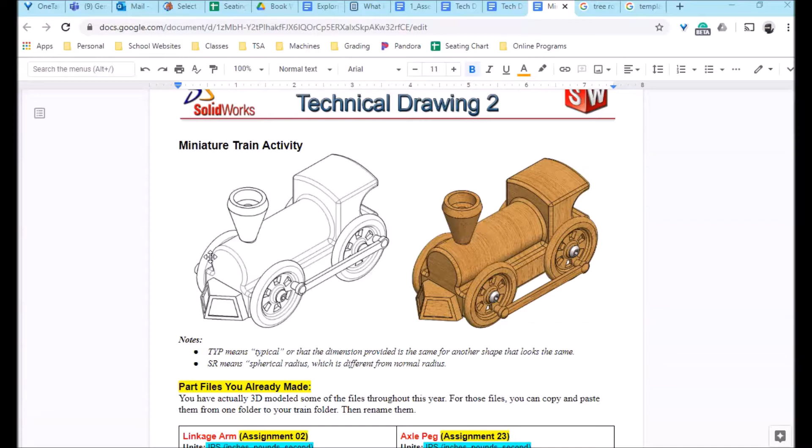Hello, this is Mr. Jarrett, and in this video tutorial we are going to be 3D modeling the remainder of these miniature train parts and going through the assembly in SOLIDWORKS.

Depending on your class year, this may change from year to year, but in most cases you've probably already drawn a lot of these parts for the train. The assignment number might have changed since I change the class all the time, so just look at the pictures and think back to what you've already drawn and check it off.

For the year that I'm actually making this, students would have already made the linkage arm, the axle peg, the smokestack, the wheel, the train body, and the cow catcher. That's in most years, so depending on when you're taking the class, you may have more done than that.

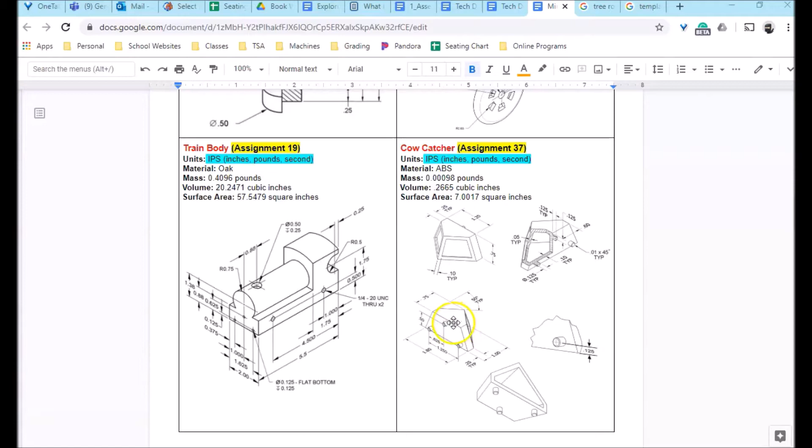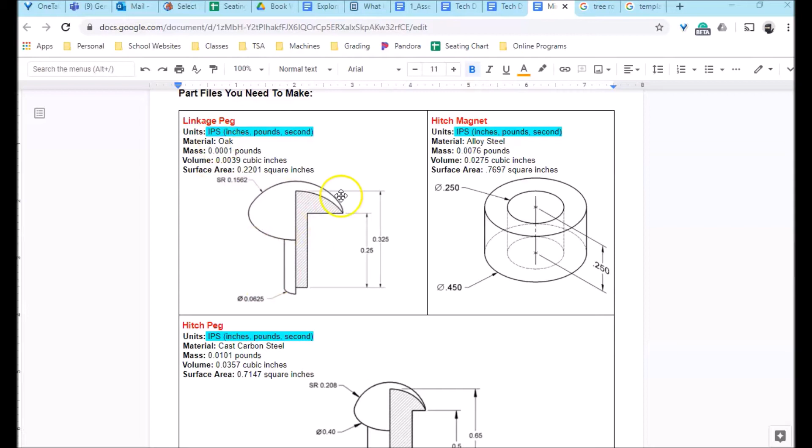The extra files, which I don't necessarily draw in class because they're so easy, are the remaining ones: the linkage peg, the hitch magnet, and the hitch peg. We're going to start by drawing these. As you can see, they're all in inches. The majority of them are oak - this one's oak - and I guess this is alloy steel and cast carbon steel.

I'm going to pull this to my other screen, and I'm just going to start out by making new parts. We're going to go right through each one. We're going to draw the linkage peg first.

Make sure you're in IPS, and I'm going to be sketching right on the front plane. It doesn't necessarily matter where you put the origin, so I'm just going to put the origin down at the bottom. I'm going to go straight up, and then it says spherical radius. If you have the line tool, you can move your mouse over this dot so it curves. If yours does not do that, you can just get the curve tool. I'm just going to come straight in and down like this.

A spherical radius means when this is an actual three-dimensional shape, you don't have a dimple here, meaning the center point needs to be on this center line.

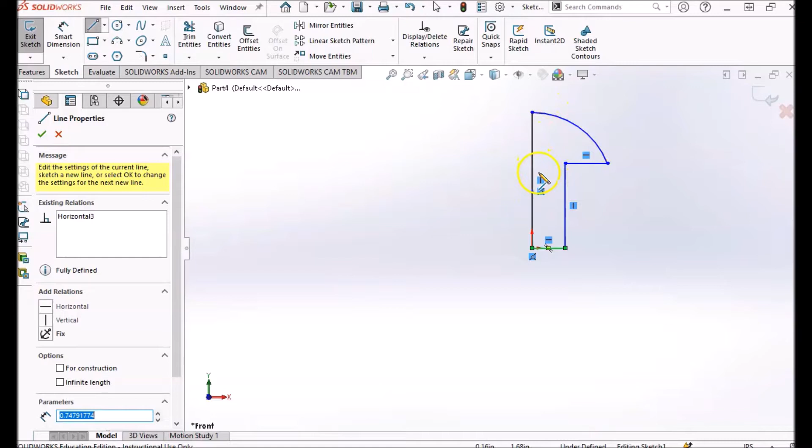Okay, so then we can go ahead and actually dimension this. It says this has a diameter down here of 0.0625, but we're only drawing half of this currently, so you have to divide that by 2. You can set this to 4 or 5 decimal places if you'd like - this is actually 5 decimal places, but it doesn't matter to me if you do that.

Then this is 0.25, and we do not have to divide that by 2 because we're talking height here. This is 0.325. And it says that this has a radius of 0.1562 - kind of an odd measurement.

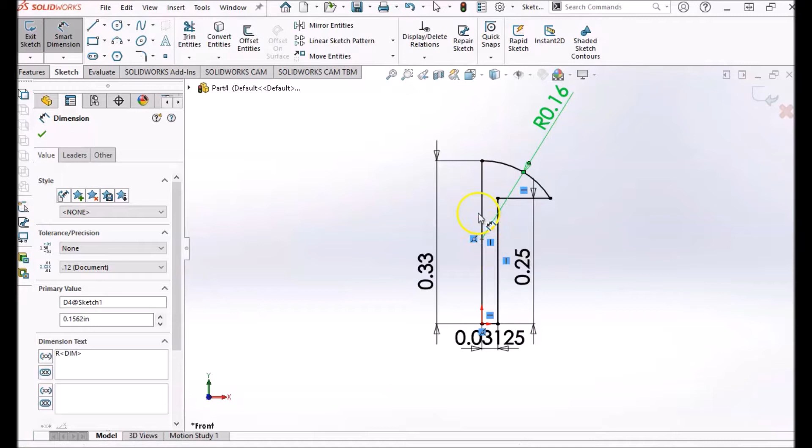Make sure that the center point is coincident with this center line, so it's right on that center line. You can go to the Features tab and hit Revolve Boss Base, and we want this center line as the axis of revolution. Okay, we can change our material to oak.

You probably have to go into Edit Material and down to Wood. I have mine set as a preset, but I probably did not do that with you in the past. So go to Edit Material, down to Woods and Oak, then Apply and close.

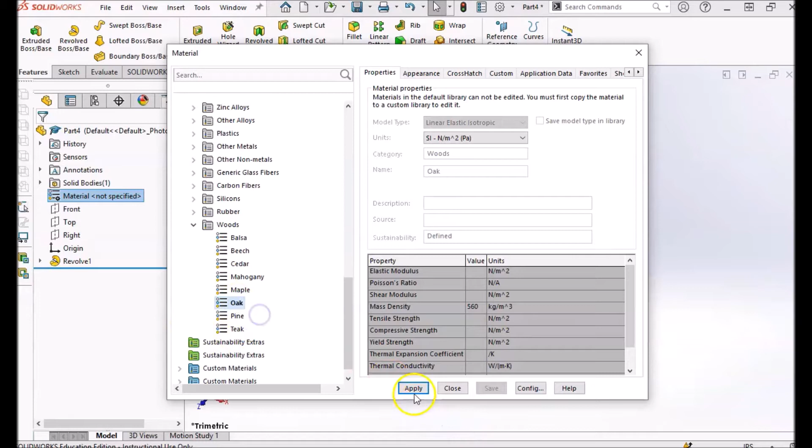You can evaluate it and check it, but I know this is correct, so I'm just going to save this. You can go File, Save As, and save it as the linkage peg.

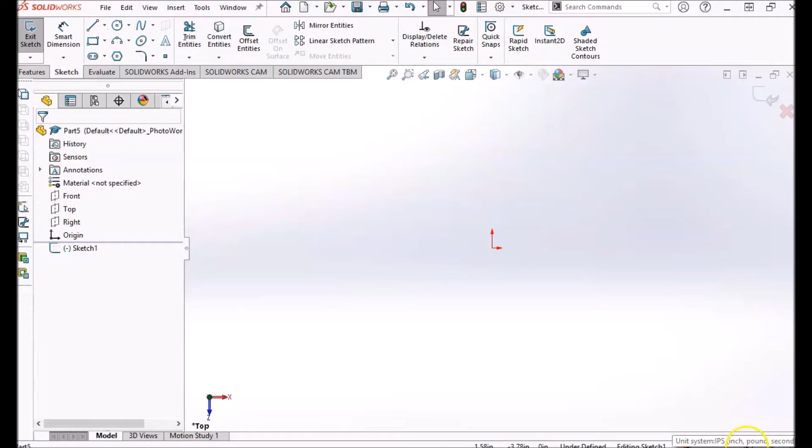Then you can start a new part file - and you notice I didn't save mine because I already have these done. But you're going to make a new part file, and this time we are going to be sketching right on the top plane. Again, we are in IPS. It doesn't matter if you go on the top plane or front plane, but we're going to be drawing with the circle tool, 2 circles, both centers right on the origin.

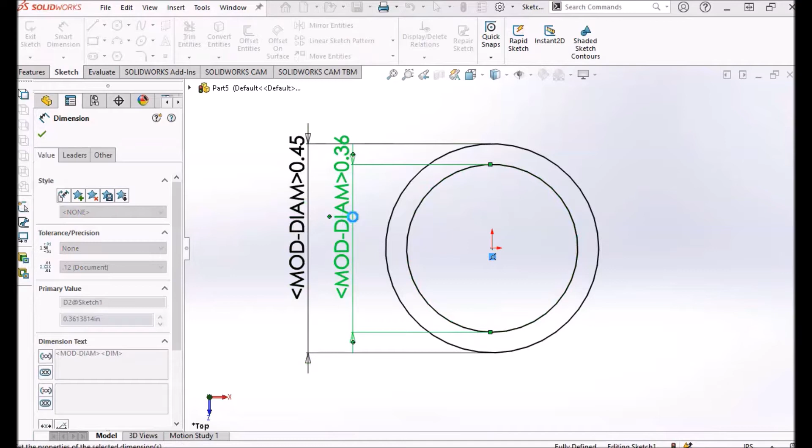Then you can go ahead and start to dimension this. The outside is a diameter of 0.45, the inside is a diameter of 0.36. And we're going to extrude this a total of 0.25.

We can change our material - that's alloy steel, so notice that's not one of these presets. We can hit Edit Material, and in the steel folder, we just need to scroll down until we find alloy steel. Hit Apply and close, and now you can save this as well. This is the hitch magnet.

Then we can make another part. And this time we are going to do the hitch peg. This one's very similar to the linkage peg, just a little bit different in shape and size.

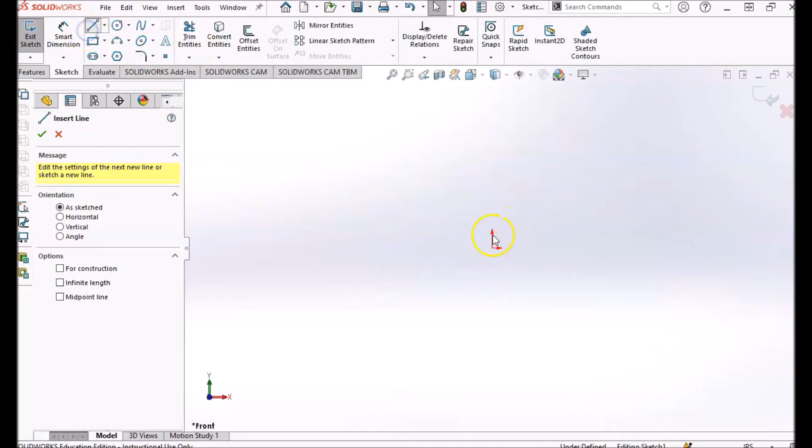So again, I'm just going to draw this on the front plane, origin right here in the middle. This is still in inches. You can wiggle your mouse back over that dot with the line tool, and it should give you a curve. If it doesn't, move your mouse over that again. You see it kind of changes through the different curve tools. Straight over, down, and back.

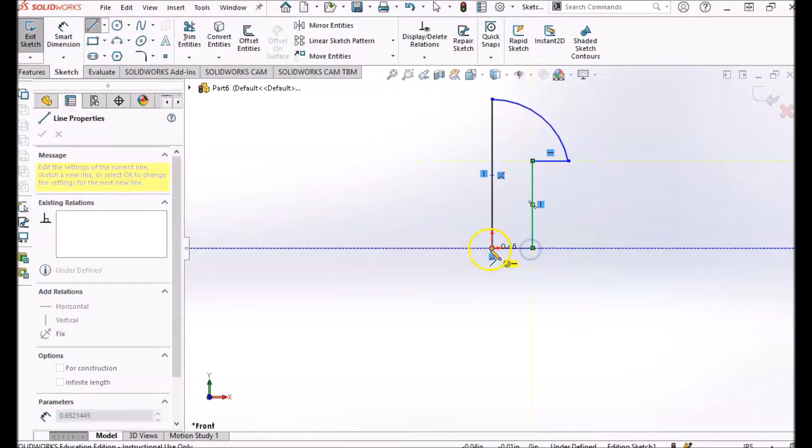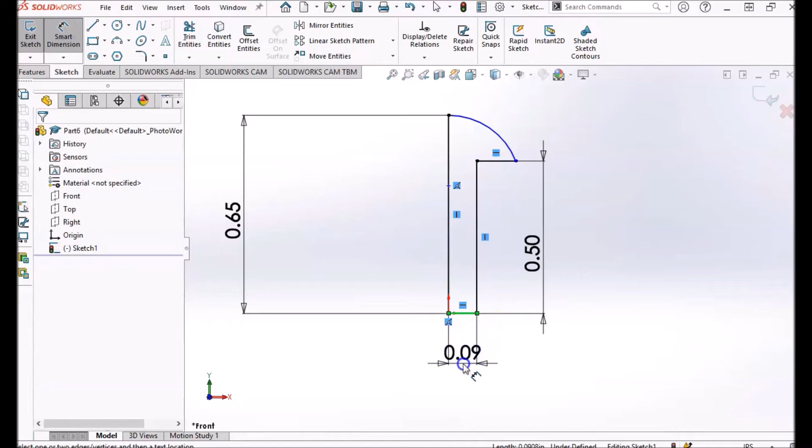Okay, then you can go ahead and start to dimension a lot of this. So 0.5 is the underneath height, and the overall height is 0.65. Mine kind of got messed up here, so if you hit escape and move your dots around to keep that general shape, that's what you're looking for. This line at the bottom has a diameter of 0.25, but since we're only drawing half, we divide that by 2, so that's 0.125.

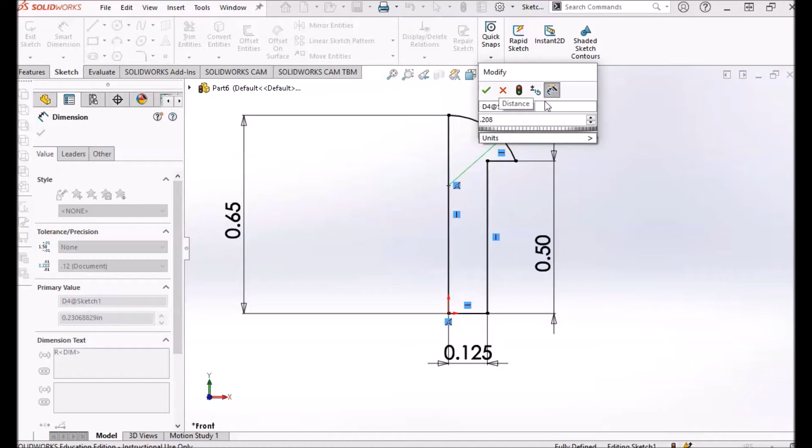Then once again we have a spherical radius up here, and that is 0.208. Since that's a radius, we don't have to divide that by 2. Make sure that your center point for that curve is right here, coincident to this center line.

Then we'll go to the Features tab and Revolve Boss Base, and once again we're going to be selecting that center line there. Hit the green check, and now we can change our materials.

So this is cast carbon steel. We're going to hit Edit Material, because that is not one of the defaults. Scroll down, you see cast carbon steel right there in the steel folder. Apply and close. And now you can save this as the hitch peg.

So now we have those 3 drawn. From here, we are going to start assembling our train. So we can start by making a new assembly, and we're going to be doing this all in IPS. When you open up a new assembly, it's going to ask you what you want to insert.

Sometimes this box does not pop up. If that's the case, you have to hit Browse down here in the bottom left. And you can see I have a whole bunch of files in here. You'll be seeing that this is going to take us a long time. There's one with constraints, one without constraints. There's a lot of different stuff that we have to do here.

So we're going to do this bit by bit, easy things first, and then we'll get into the more challenging stuff. So when I say easy stuff first, I mean we are going to be putting in the train body. I believe the train body is going to be assignment 19 in most years. If yours is not really showing pictures, or if your assignment numbers are different, you can change your view options over here to icons, and most times it'll give you the pictures. So assignment 19 for me, the year I made this video, is the train body.

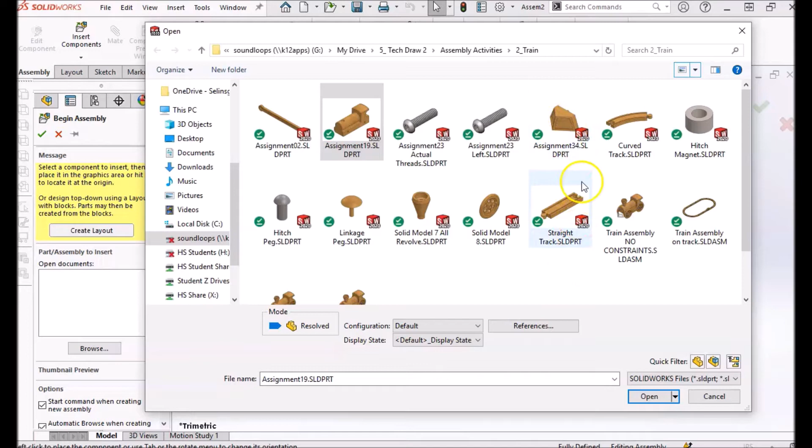So I'm going to be bringing that in. I'm going to hold Control, and I'll do the cow catcher because that's pretty easy. I'll do the hitch magnet, I'll do the hitch peg, and the smokestack for right now. Okay, and I'll hit Open.

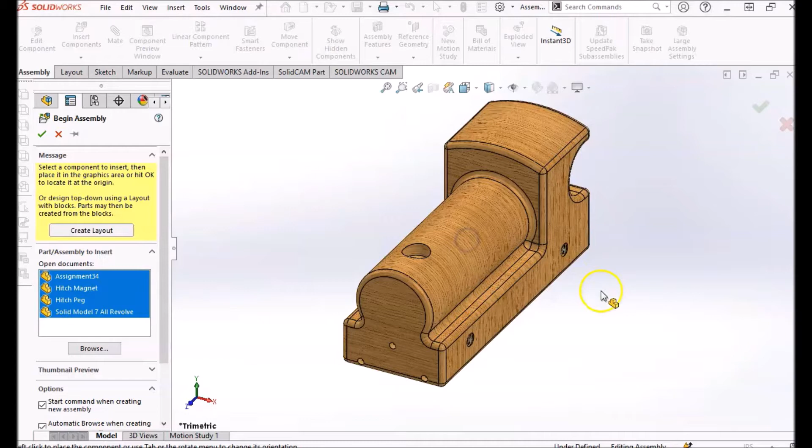So it's going to ask you to place them in, so you can just click to place. I'm going to just put them in the areas that they need to be, so behind the train and in front of the train, and the smokestack goes up on top. Okay, so let's start with this first.

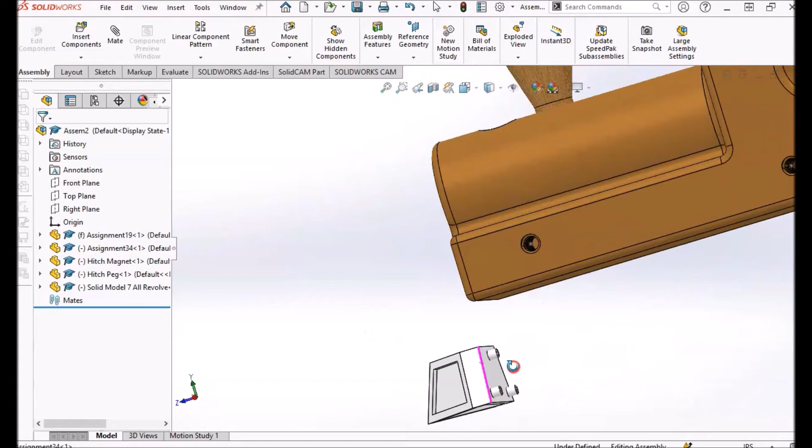You can see there's 3 holes there, and back here there's 3 holes, or 3 pegs. So obviously those go right in those. But before we even do that, we want to make sure that the train body is actually fixed in place. So you can see if I try to move it, since this went in first, and it goes by alphabet, alphabetical, this one was assignment 19.

If your train body is able to move, and say your smokestack is stuck in place for some reason because you had these labeled differently, what you need to do is right click on this, and you would have to hit float, or fix, sorry, it would say fix right here.

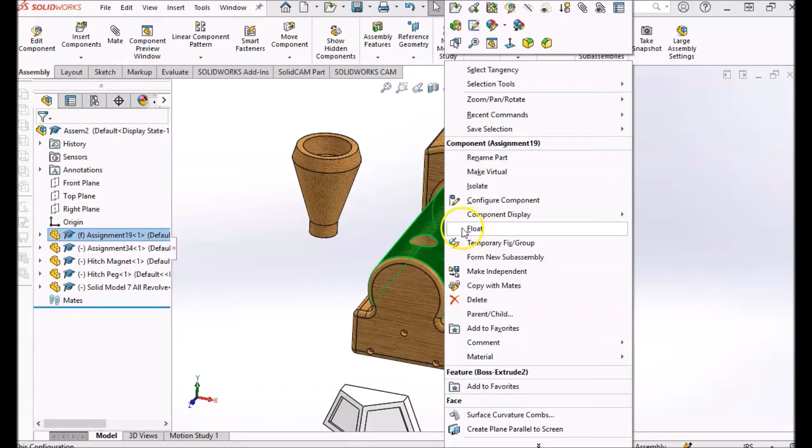And your smokestack you would want to float. But for me, I have it fixed because this is locked in place. So we want the train body to not move, and we want everything else to be underdefined and able to move.

To start out, we're going to get our mate tool, and you could do this a bunch of different ways. I think a very easy way is just putting this top peg in first. If we click right in here on the inside of that cylindrical hole, rotate around and click on the cylindrical peg itself, notice it makes them concentric, so we can hit the green check.

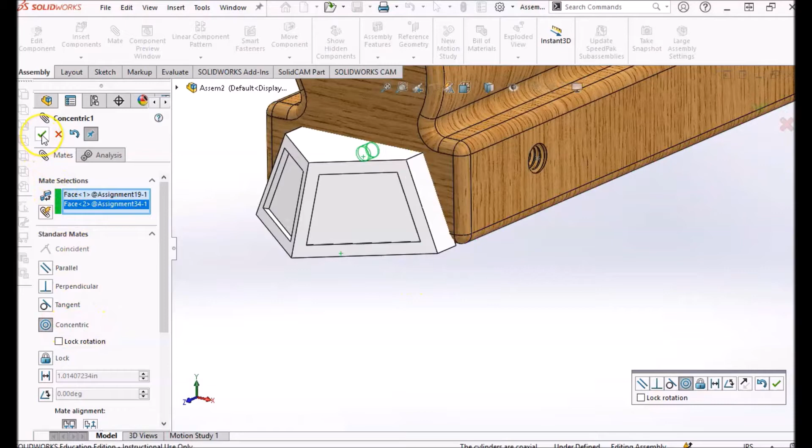Now this thing is kind of stuck in there. It can still rotate and wiggle. So if we do the same thing for this peg, clicking on that peg and this peg right here, now it can't rotate anymore. The only thing it can do is slide in or out.

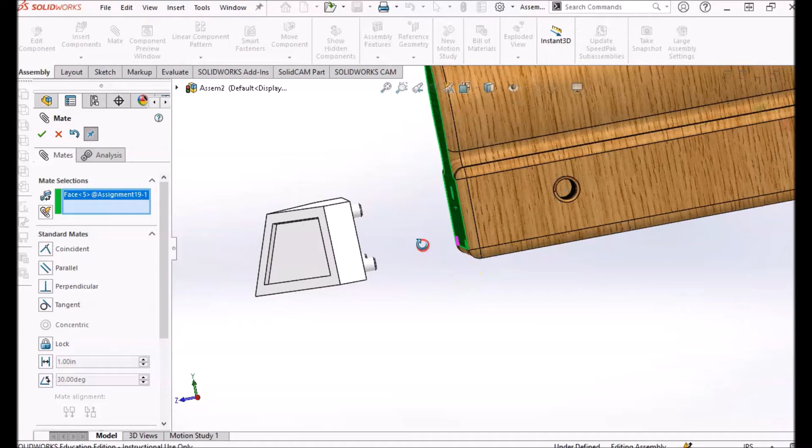So that's pretty simple. Click on the front of the train, back here of the cow catcher, green check, and now it is stuck in place. Okay, so that's number one.

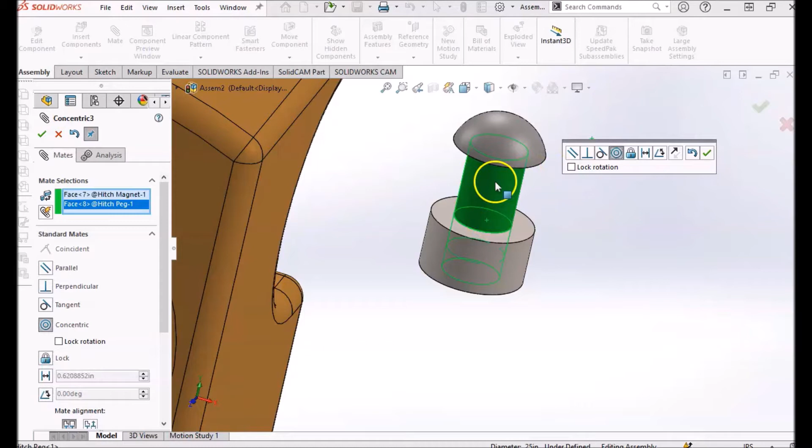Let's go back here to this. So the inside of the hitch magnet and the cylindrical part of the hitch peg, and we're actually going to check the box here for lock rotation so it doesn't rotate on us. Green check, and we'll click on this piece and underneath, so those two go ahead and touch.

If you're wondering what this actually is, in the old toy trains this was kind of just like a bolt that was glued in. I don't think it had threads, it just got glued in. And this is actually a magnet. So since this is a piece of metal that is magnetic, this round piece would be on the front of the next body of the train.

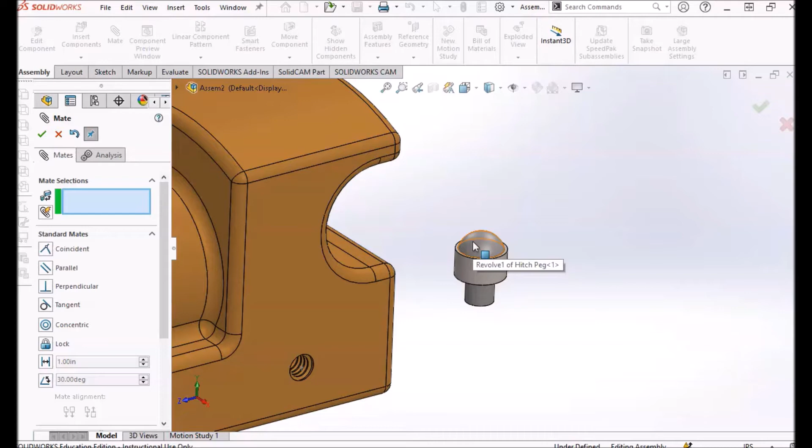So this is the very front car of the train. Obviously you have your cow catcher on it. The next train body piece would actually have this same connection piece, but on the front. So as it rotated around, those two curved surfaces were just kind of magnetized to one another, and just rotated on top of one another.

So now let's do this. Let's click on that cylindrical part and this hole. Okay, so it lines those two up. Again, we can lock the rotation so it doesn't rotate. Green check. Then the back of the train, and you have to zoom in here and click on the back side of the magnet.

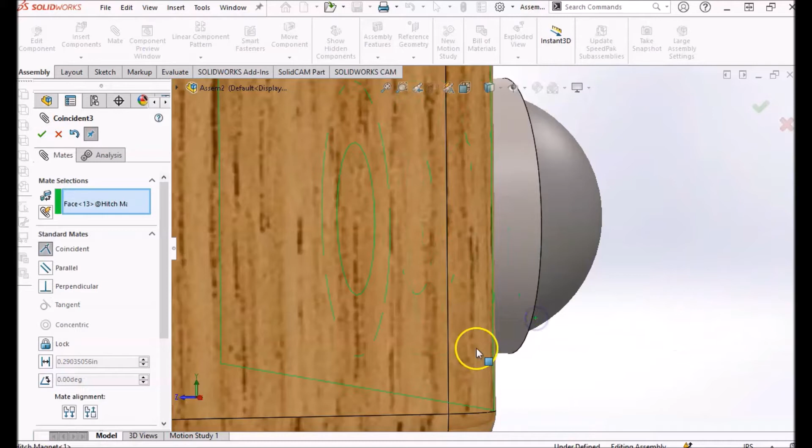Okay, so now that is stuck. That thing can't move.

Same thing for the smokestack. Let's click the cylindrical body piece right there and cylindrical part of the hole, and we'll lock that rotation. Green check. And right now it kind of went inside the body, that's kind of hard to do what we need.

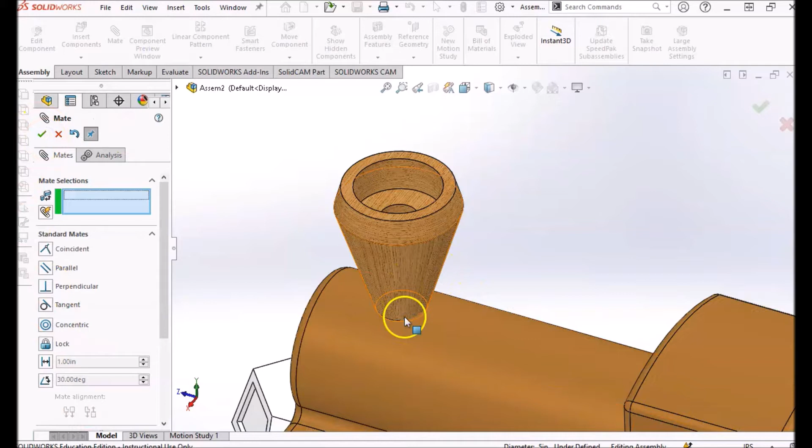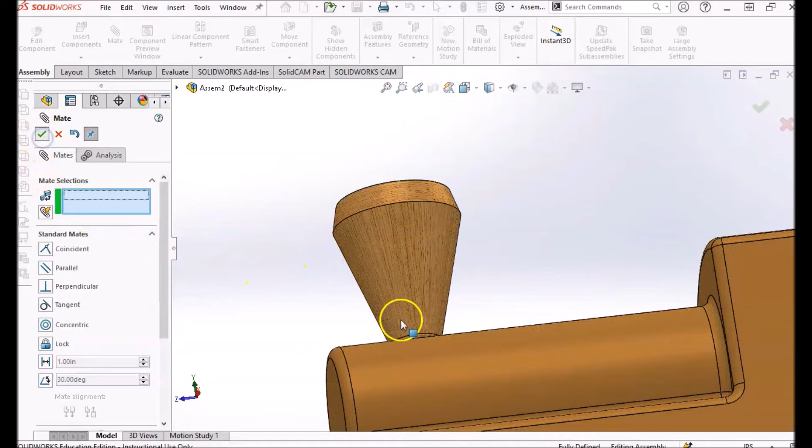So let's move this up. And you can see I have a flat bottom there. If you don't have a flat bottom, because maybe you did yours differently, you can just use this ring. I'm going to use my flat bottom and the flat bottom of this. Okay, and green check. So that thing should not rotate, should not move anywhere.

It's stuck. So if you're ever wondering why did we have to do 3 mates for this and only 2 for those, it's because we checked that box of lock rotation, that would actually be that 3rd mate.

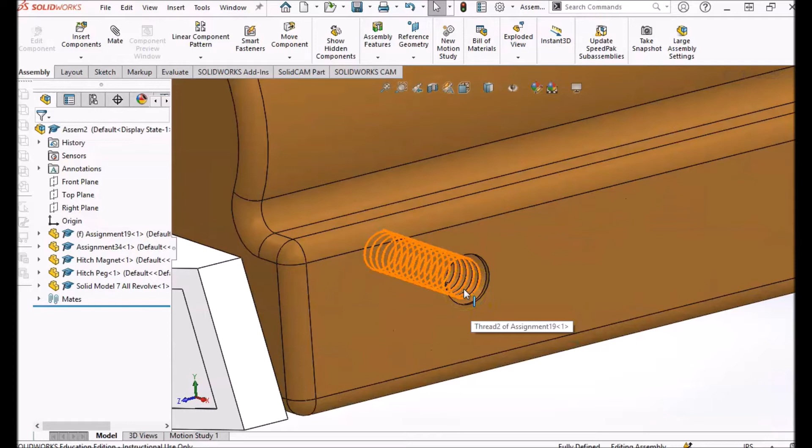So that pretty much finishes up all of the easy stuff to do. And I say easy stuff because moving forward, you see we actually put threads in here. And we actually put left-hand threads and right-hand threads, depending on what side this was on. Now, if we were in person, I would probably show you the in-depth way of actually threading and doing the correct mate to thread those bolts in there.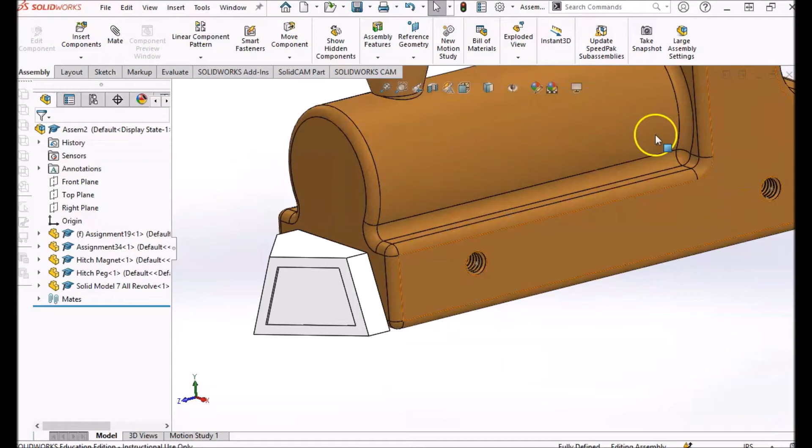Since this is going to be a virtual lesson here that maybe you're watching from home, or you're doing this as a catch-up because you got behind on your work, I'm not going to take you through that tedious, long process because you actually have to do that for every single one, and it does take a long time. I actually paused the video during this recording and tried to see how long it would take me to talk through doing one of them, and it was way too long to actually have to do that through all 4.

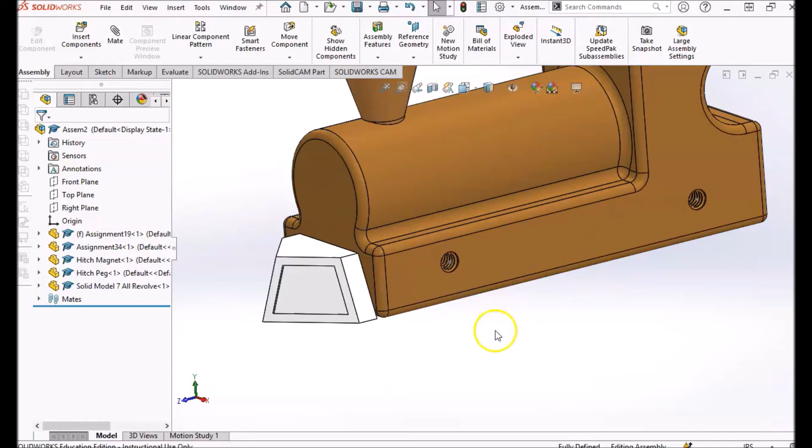So we are going to be putting those bolts in, but we're kind of just going to ignore the fact that these have threads. So we're going to insert components, and now we are going to be bringing in the wheel and one of your actual bolts. I don't care if you bring in your right hand thread or your left hand thread. It really doesn't matter because we're going to ignore the fact that it even has threads on it.

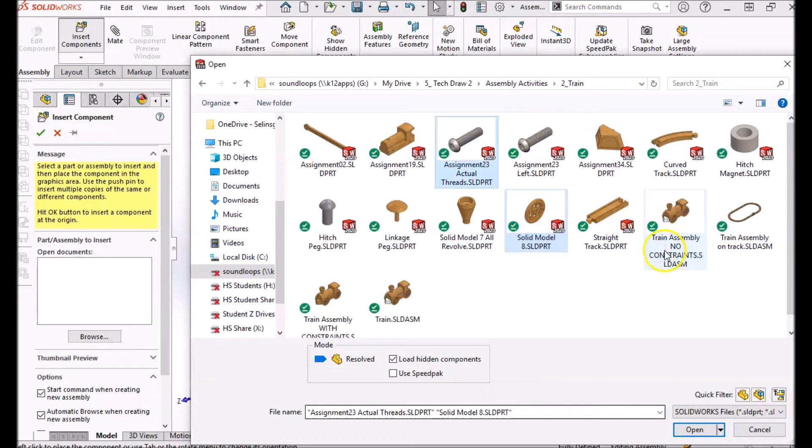We're going to hit open and place those in. And on our wheel, it actually has this little flat spot right here. You can kind of see it curves up and then it flattens off. So as you can see, it's flat right there. So we're going to use that flat spot to our advantage, and that's going to go underneath here. And obviously this is going to go right through the hole.

Now, since this does have the threads on it, it is kind of hard to click on the actual cylindrical part of this. You can do this ring out here because it's still going to be the same thing. It'll just line up the centers, but I'm going to show you something different. Up here you have all these different small options, this display style, and then there's the eyeball. The display style is something you've probably used before, or maybe this little view cube to rotate around.

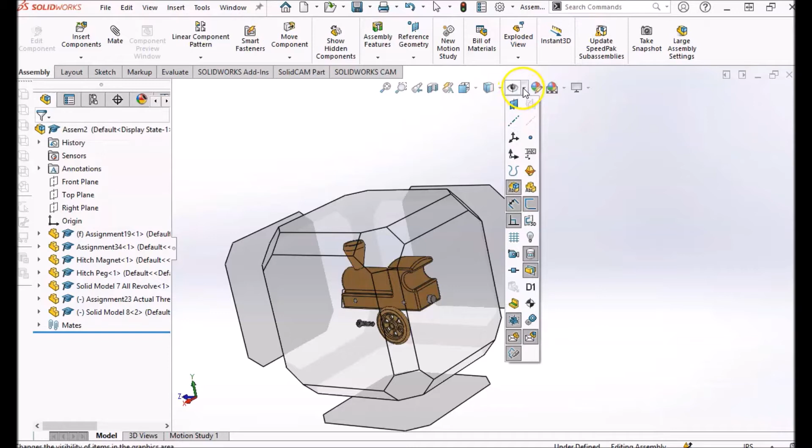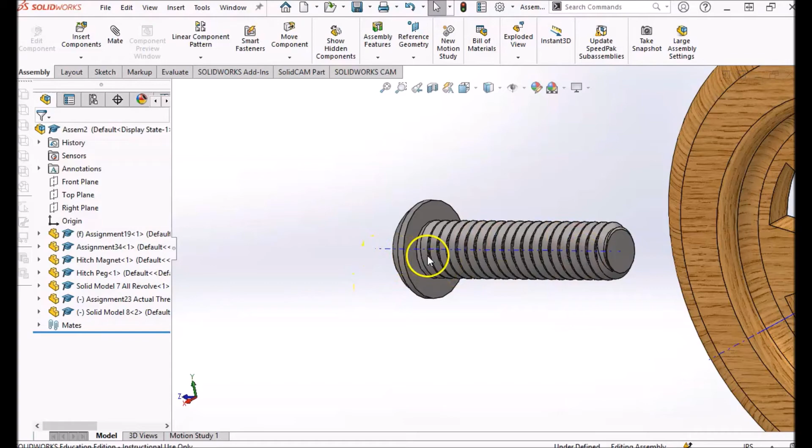This eyeball is where you can see a whole bunch of different settings that you can currently turn on or off, like your relations if there's a lot of relations. Well, there's also temporary axes. So I'm going to turn on this temporary axis that's underneath that eyeball. And for an odd shape like this that has those threads, it actually puts an axis right through the middle of anything that has a circle, or anything that has a hole. So it's going to be a lot easier to line these up.

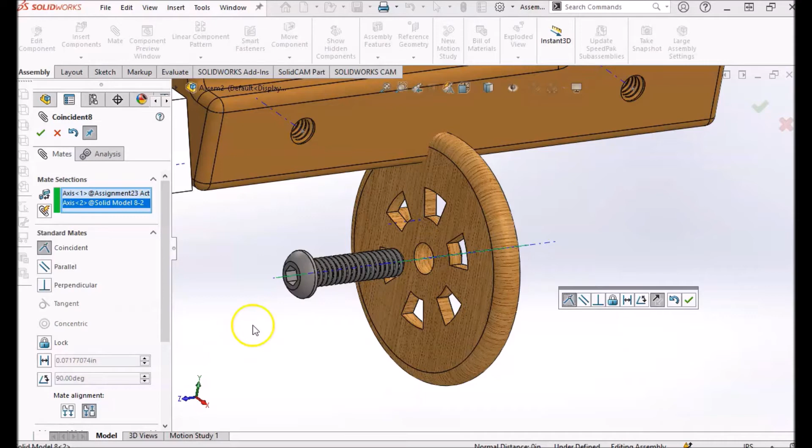We're going to get the mate tool, and I'm just going to click on those axes. And you notice it kind of rotates there and lines those up. Now it also made my wheel go the wrong way. If it does that for you, you want to change your mate alignment. And that's just down here. Hit the green check. I'm going to zoom in.

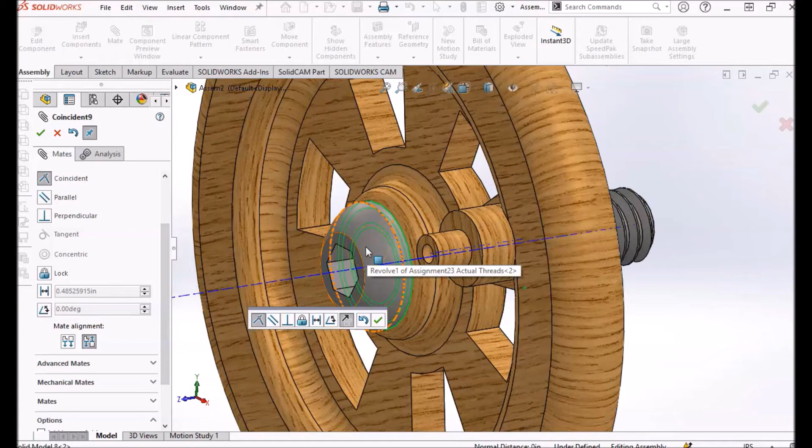I'm going to click on this flat part here, rotate around, and I'll click underneath this bolt head. And you can see now the bolt head is going to be resting on there. And I'll hit the green check. Then I'm going to select this axis. I'm going to zoom into one of these holes, select that axis. Again, if it's facing the wrong way, you can rotate that around.

So this really should be over here more. So I'll just hit the green check and then I'll move it. And then I'll click on the flat wall, rotate around, and click on this flat wall. Now again, I am not actually doing the correct mates here. I'm doing this like there are no threads.

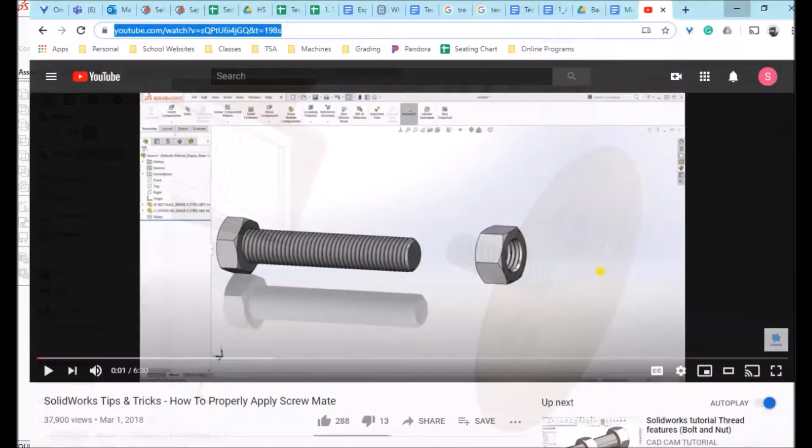If you want to learn how to actually assemble this by using your threads, I hyperlinked this video right here on our document. It says if you want to learn how to actually assemble the threads the correct way. I put a link here, and this is how I learned it. This is somebody else that I found on YouTube, and they actually show you how to do it.

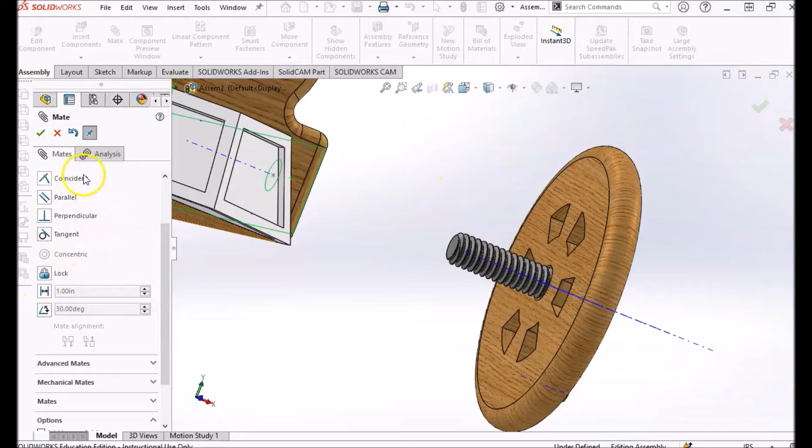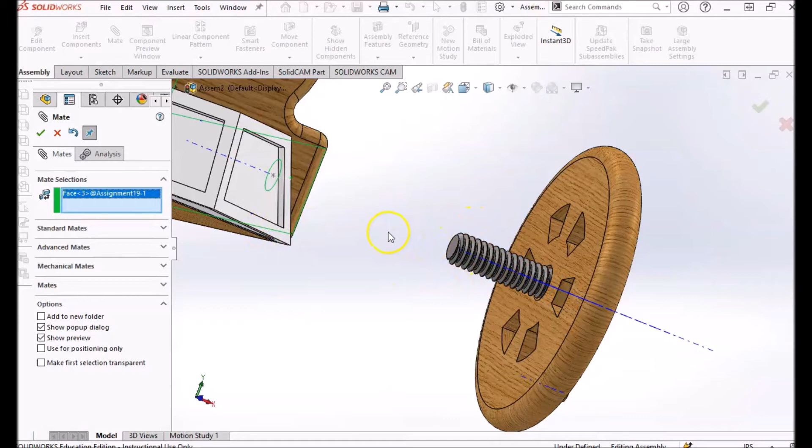So basically, underneath your mate tool, these are all called your standard mates. You then have advanced mates, as you can see. You also have mechanical mates, and that's what that would be in. There's cams, there's gears, there's screws. This is a much higher level. This would be something like a Tech Draw 3 or a college level class would really get into all this. This is motion constraints and such. So I'm just going to be assembling this like there are no threads.

So I click this sidewall of the body and the back half of the wheel. And that's going to be a standard mate and coincident and green check. So as you can see, it's kind of sucked on there. And this is just going to rotate.

So in real life, if you actually wanted to make this correct, your bolt would actually have to have what's called a shoulder. A shoulder on a bolt is like a smooth part before the threads so that this could rotate correctly on there. So that's basically the process of putting those on. Now I know a lot of you would say, well, can we just mirror this back and mirror this over?

No, you can't, because if it's a mirror, every time you rotate this, it's going to be the exact same rotation for those other tires. So unfortunately, you do have to bring this in and you do have to mate it multiple times. You could do insert component, but me teaching you here is all about learning something new.

So another way of inserting a component is actually holding in control. Okay, but before we actually do that, what we can do is actually make what's called a sub-assembly. So if I select the wheel, hold in shift and select the axle, okay, I can right click on these and I can say form new sub-assembly because it's going to save us a couple mates. So now these two are one sub-assembly, as you can see.

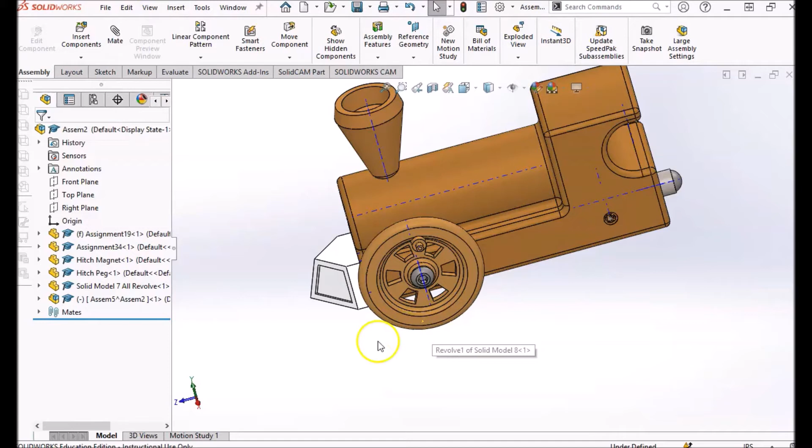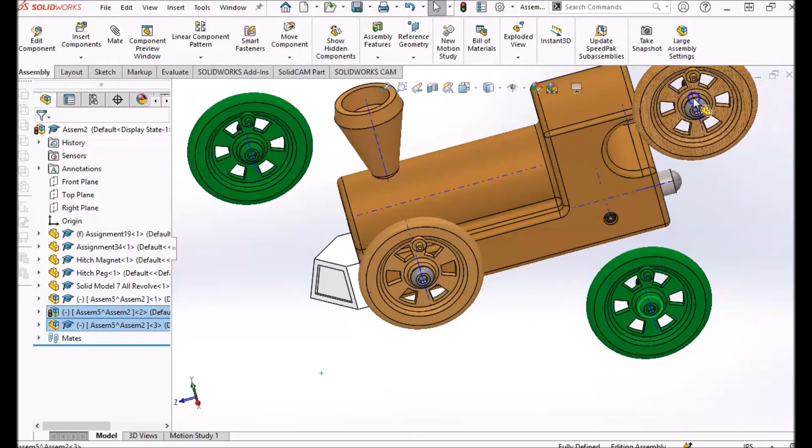So like I said, if we hold in control and not drag from in here of one of these parts, but drag the word from where it says assembly, you drag that and drag it in and let go, you see it copy those two. And these two are already stuck together. So that just saved me about 12 clicks. So you can do that again for this side, do it again for back here, and that's going to save you a significant amount of time. As long as you bring in the correct amount. You can see I brought in 4 wheels here.

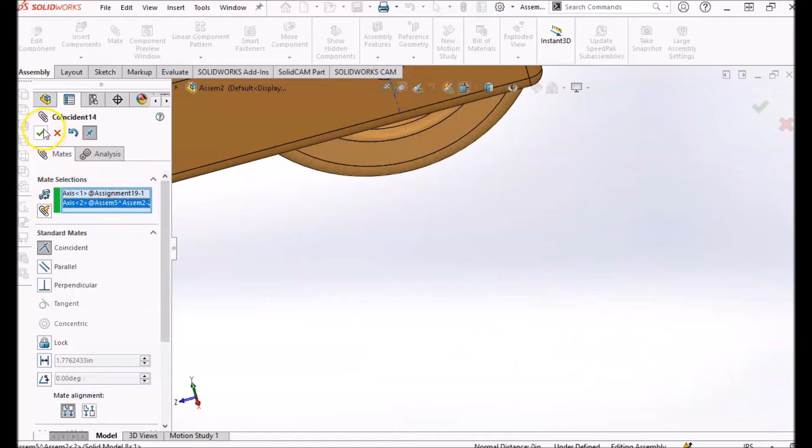So now let's go ahead and do that once again. So I think it's easy if you just zoom in, you click on this axis, click on this axis, green check, that wall to the wall it's going to touch, green check. So that just saved me a lot of time, as you can kind of see.

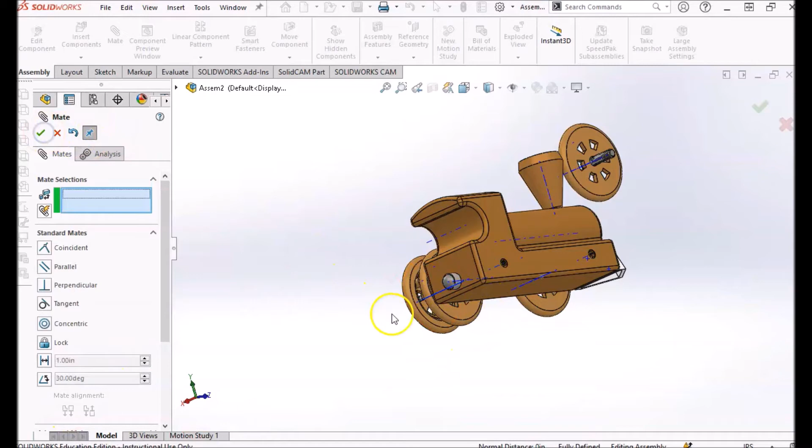Now when you're doing the wheels on the opposite side, make sure you flip the mate alignment so the wheel's facing the opposite direction. So if you didn't just see what I did here, I had to do a mate alignment so it flipped around. Okay, wall to wall, green check. You can see these temporary axes actually come in handy. It's a lot easier to click on. Mate alignment, so that rotates around, green check.

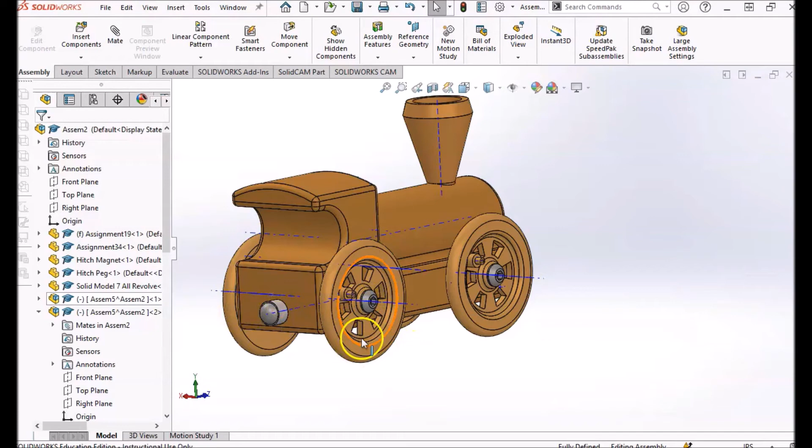So just to kind of brag about how good that forming a new subassembly was, you think about this, I just had to do roughly 12 clicks just to assemble one of these wheels. So there's 12 plus 12 plus 12, and that's not to mention the extra 12 plus 12 plus 12 you would have had to do to put that axis in. So that's a lot of clicks. So I just saved you a bunch of time.

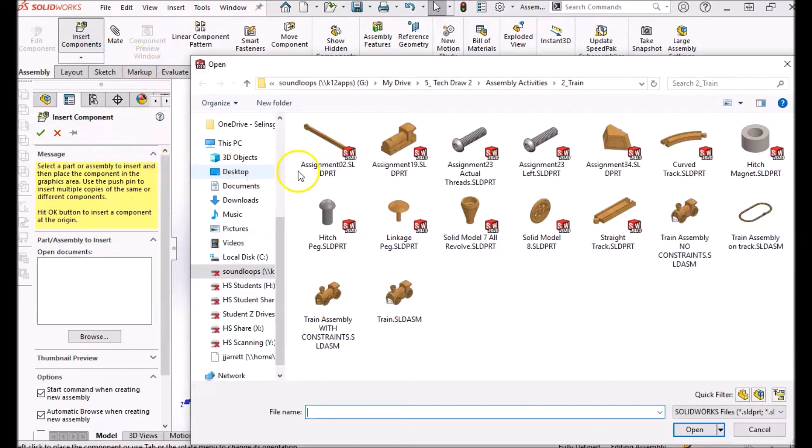So now all the wheels are in. You can still use these axes if you'd like. You can turn them off if you don't want them on there. Since we do have some other circular things, I'm just going to keep mine on for a little bit. But now we're going to insert the other components. And now we're going to do the linkage peg and the linkage arm, which is probably one of the very first assignments you drew in this class. Okay. And this basically just goes on there and connects to the other one so that they move together.

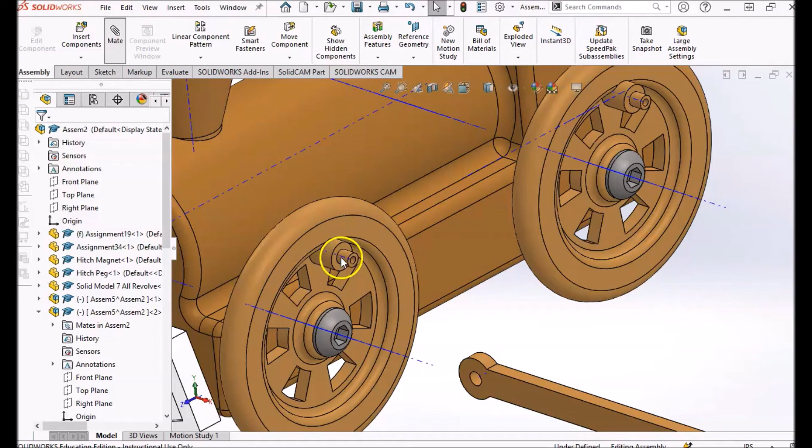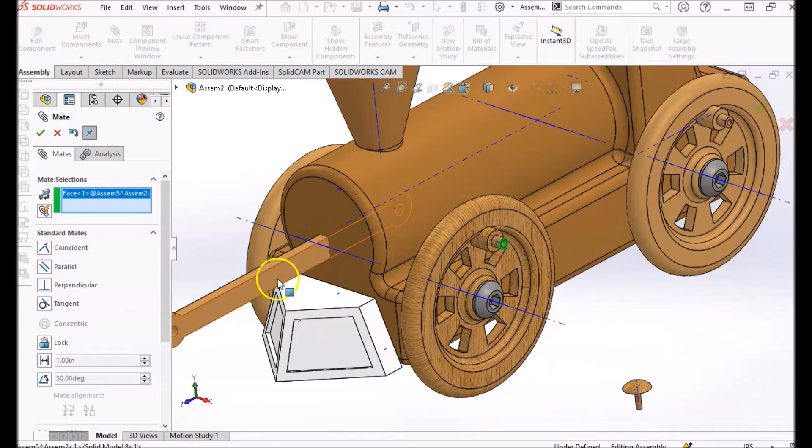So again, we are just going to use that axis, zoom in on that axis, okay, green check, and then you're going to do this flat part here or the outside piece, doesn't really matter, just make sure you know what you're actually clicking on. So I clicked on that outside piece and I'm going to do the outside here. Okay, so you see they're flush. So it really doesn't matter which one you do, just make sure you're clicking on the corresponding side that actually touches it or is flat to it.

Okay, so I'll do that same thing again, this axis to this one. And you notice it probably rotated and flipped all the way over there, green check. And since we already said the outside here needs to be flush, that automatically is going to be flush. Okay, so you can see now when I move this, they actually move together.

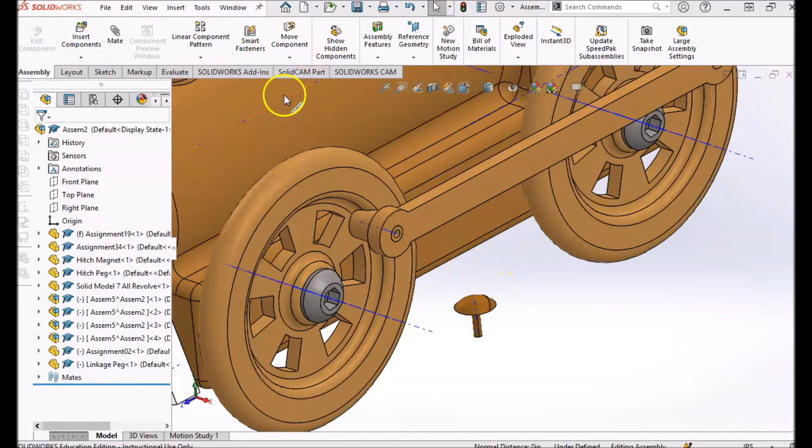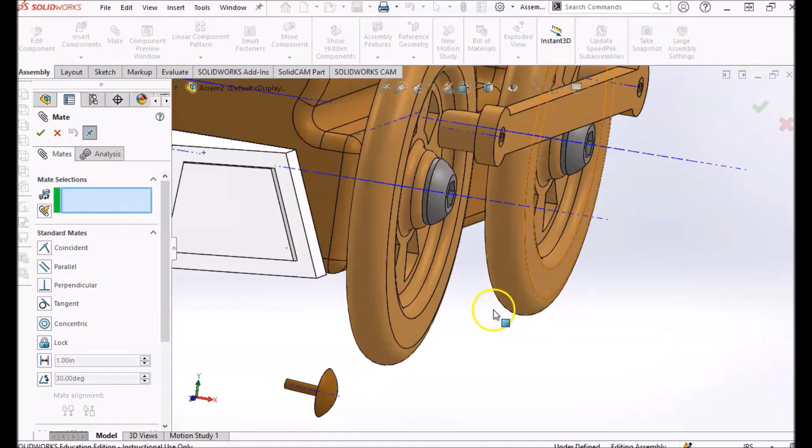Now we're going to be putting this little linkage peg in, and since this is so small, sometimes it rotates and goes inside your train body. So what I like to do first is actually go up to where it says move component and select the drop down, and I like to rotate this thing so that way it doesn't flip and rotate and fly away on us. And I just kind of rotate it in the direction it's going to be going. Now I'll hit mate. If you want to drag this somewhat closer, you can try. So you might want to go to a different view.

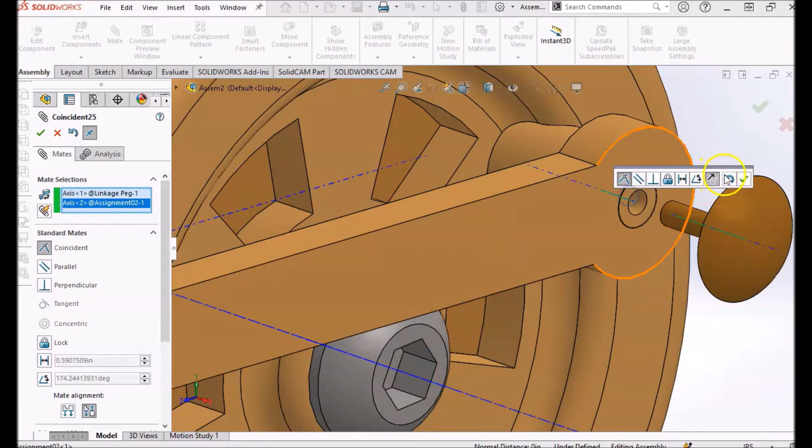Okay. So I don't want that point, I actually want this axis. And we're going to do that axis back here. Green check, click that flat piece, and underneath, and green check. Okay, so now that's on.

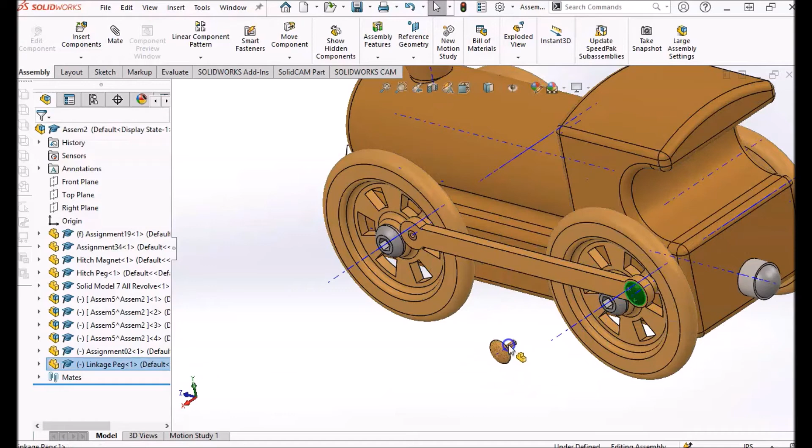So you don't really want to form a subassembly here with these. I mean, I guess you could, but you wouldn't really be able to see this side as well. So what I'm just going to do is just show you how control will actually work. You just hold in control and click on that part and drag, it copies it off. It's the same thing as inserting the component. So I'll just go through that same process again.

So axis to axis. And then flat side to the flat side. Okay. Now that you have all three of these, if you want to form a subassembly, you can. So you can hold in shift and select those. And you can say new subassembly. But you most certainly don't have to. You could just insert the components again and put them on the other side.

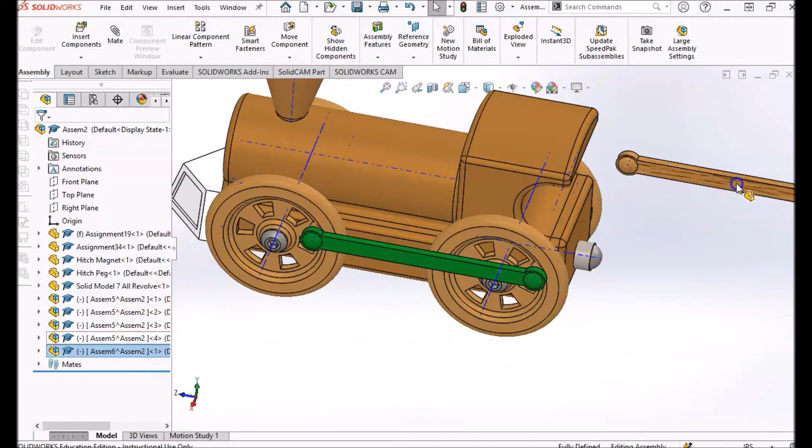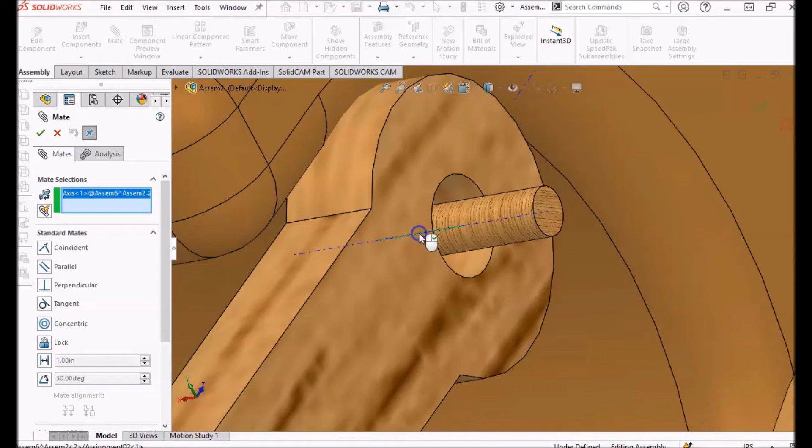But I'm just going to copy this and bring this over because those should all be at least connected together. So let's see if we can do this part now. Easy enough. So you might have to move your mouse over that axis a little bit. I noticed out here it wasn't really giving it to me, so if you move your mouse in, it did give it to me a little bit easier. So same thing here, you might have to move around on that axis so it allows you to select it.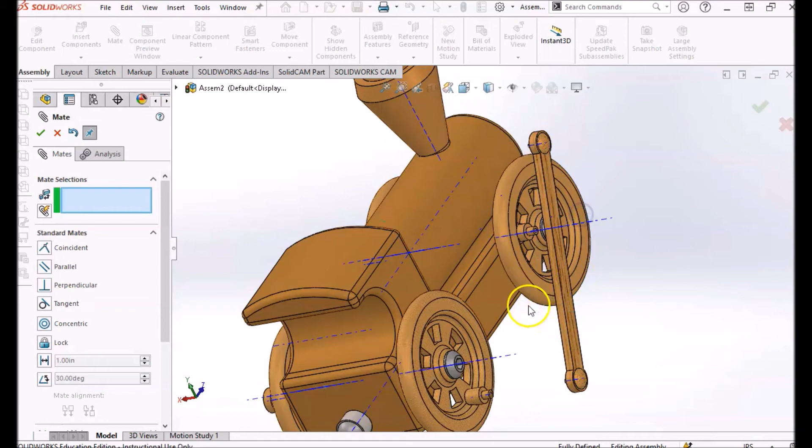And you do have to do the mate alignment because we're on the opposite side. So change your mate alignment for flip-flops. You might want to drag this out a little bit. And before I actually put this flat on here, I am going to do the other axis on the opposite wheel just because I think it's a little bit easier to click on now before it gets covered up. So basically those are aligned way out here. It's just not touching. So that kind of looks funny, but it's actually doing the correct thing that it needs to be doing.

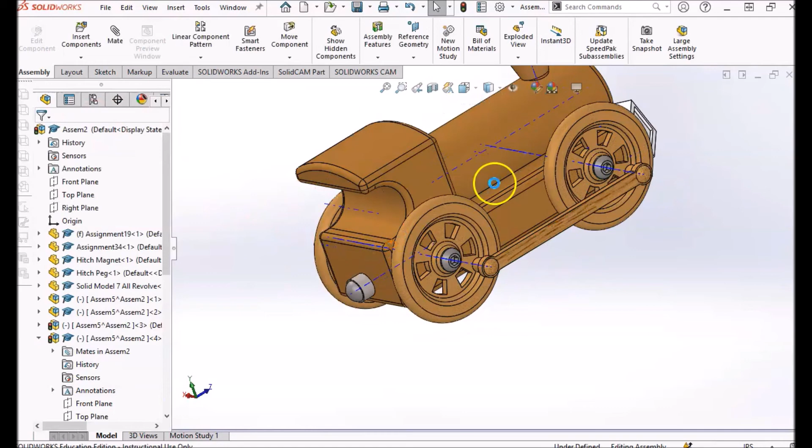Okay, so then this time we're going to use this flat piece and the underneath side, and that should be on there correctly. We only need to do it to one of them. So if I hit the X and I go back to an isometric, I'm going to turn off my axes, my temporary axes. That's the eyeball, and unclick that one.

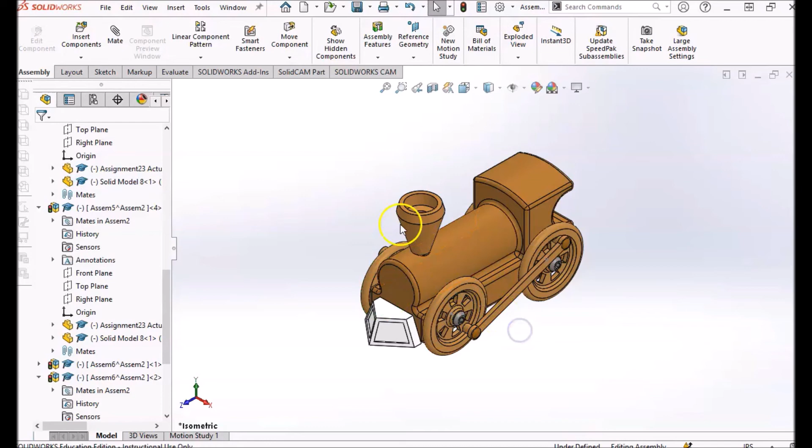As you can see right now, this thing looks like it's done. Most people say, hey, this is pretty cool. Well, it is, but if you can see what's going on right now, a train would not work like this. Okay, a train would not be able to go forward. So that is a problem. And the other thing is, the other side does not move while we move these. So we're going to save this right here. So I would go File, Save As, and we're going to actually fix this issue.

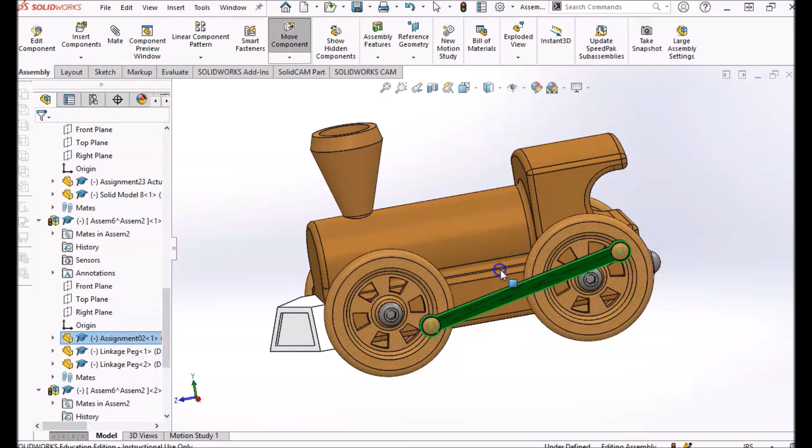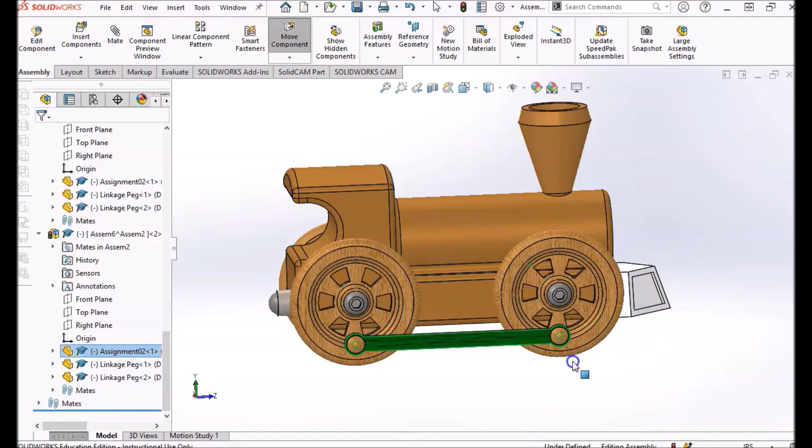Okay, so once you've saved it, what I'd like you to do is go to a side profile, like a side view of this, rotate this wheel around until you actually have this linkage arm up at the top. There we go. Doesn't have to be perfect, just somewhat up at the top. Go to the other side, and we want this to be opposite. So this is going to be at the bottom this time. If you think about how a train works, they both aren't going to be at the top together. One's going to be at the top, one's going to be at the bottom like this. Okay.

And now from here is going to be a little bit of a new thing for you. What we're actually going to be doing is mating the planes that are already existing inside of our parts. So when you draw a part file, you know you have your front, top, and right plane. Well, those actually carry over into your assembly. So you see the assembly file itself has its front, top, and right plane, but so do all of the individual parts. Okay, so we can use those planes to our advantage and actually assemble with those.

So first off, I'm going to find this wheel. Okay, so you can just select one of the wheels. And when you do that, it kind of expands things. And you see it's down here. I'm going to expand that a little bit so I know what's what. And then the wheel on the same side, so this one, I'm going to do the same thing for. See how it expands it?

And I'll expand that. Now the reason I did that is because it's a lot easier to do this and kind of look through this when it's a large menu versus that small menu in the mate window. And I'm going to try something that I haven't done before, but let's try this right now and see if it actually works. With these all expanded like this, we're going to actually try to select the front plane,

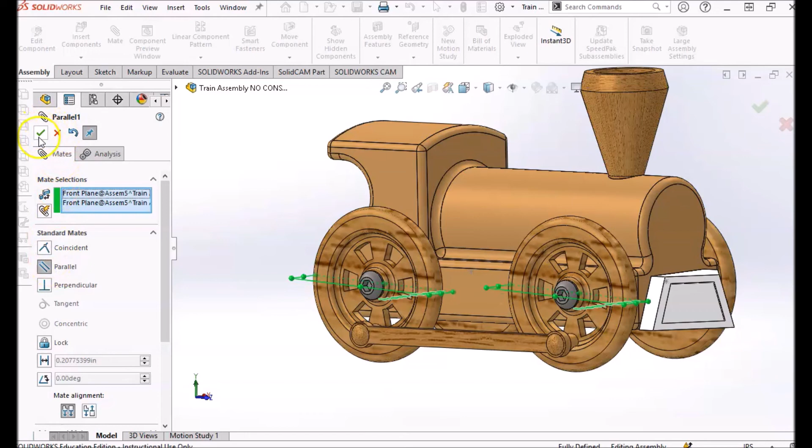Okay, if they were coincident, this would never rotate because right when this starts to go up, this obviously can't go anywhere now. So parallel and green check. So what that actually solved was that problem of the linkage peg being down here and up here. So you can see now this thing is always going to be perfect. It's never going to get that glitch where it's up there and down at the bottom of the other one. So I'm still going to keep this towards the bottom.

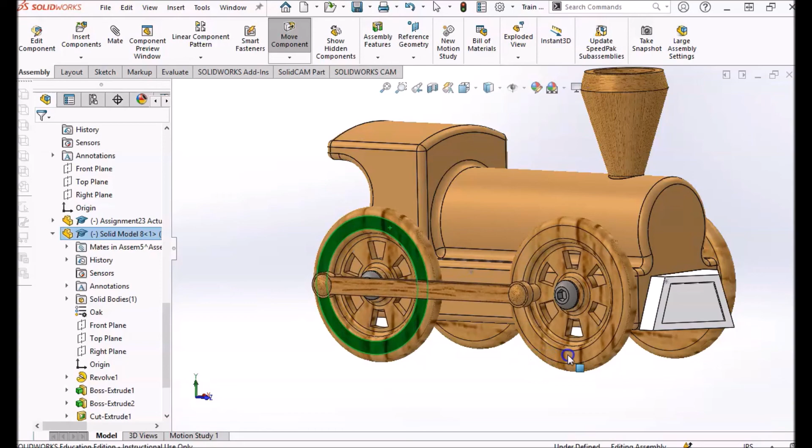I'll rotate around to the other side. And I'm going to compress all of this stuff so I don't get confused, or mix it up with the wrong set of wheels. And now I'm going to do that on this side. So this one is that wheel. I'll select that one, and it's that wheel.

So since we have 4 sub-assemblies, and these are inside the sub-assemblies, this is a lot easier to do it this way. So select the front plane, hold in shift, find the other one, or hold in control, sorry. Holding control, find the other wheel and front plane there. And now we'll go to the mate tool. And again, we need to change this to parallel. Green check. Get off of the mate tool.

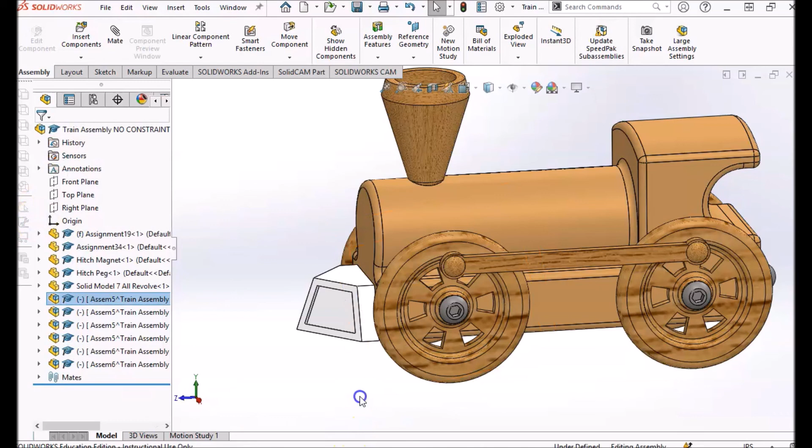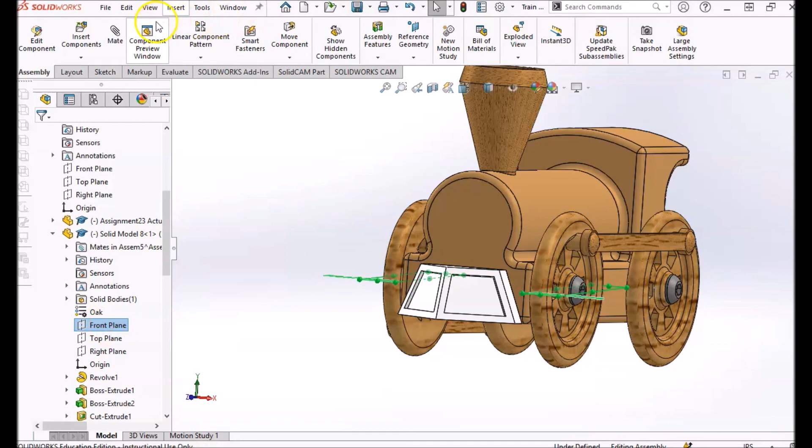And the last thing that we need to do here, we're going to compress all this stuff, is we are going to actually make this front wheel and this front wheel, their front planes parallel. So we'll select this wheel so it expands, select the other front wheel so that expands. Select the front plane, hold in control, select the front plane of the other wheel, and let's go up to mate and make those parallel as well.

Green check. Now, if we get off of the mate tool, hit Control 7 and we rotate this, it should work correctly. So maybe I've got to do it with a linkage arm. Yeah, as you can see, maybe go to a better view here, something like this. As you can see, when I rotate this, now they rotate opposite of one another, and I never have that error, and this is actually how a train would work.

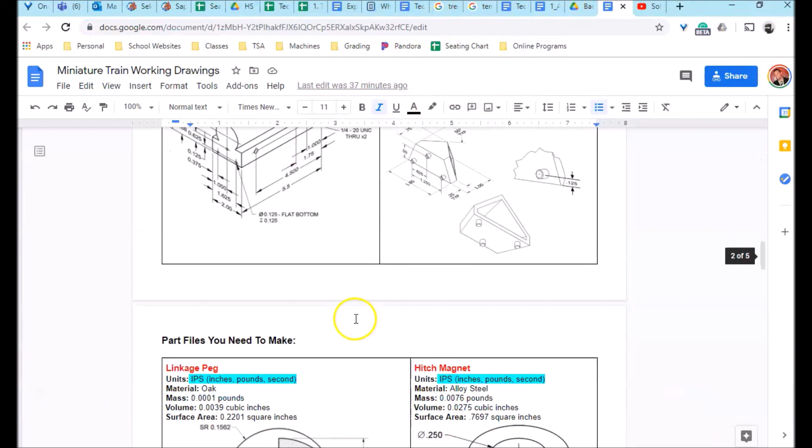So that's pretty cool. If you want to take this any further, you notice on here on the very bottom of this, I actually drew the straight track, and I even put in a picture of the curved track. For the grooves that get cut in this, they're the same thing as this, it's just this one's curved. Okay, so if you'd like to do that, you can. I've actually seen people go ahead and assemble the entire thing and actually put this on the track.

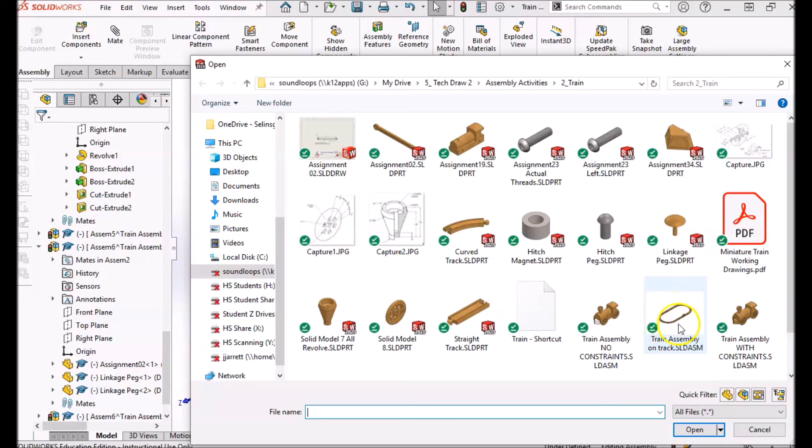So I do not have mine up to date now that I have threads on these, but you can see in this little preview here what it would look like. You can do a whole bunch of curved tracks and straight tracks combined to one another, just like the actual toy would do. And there are videos online, because I'm not the only person that draws this train.

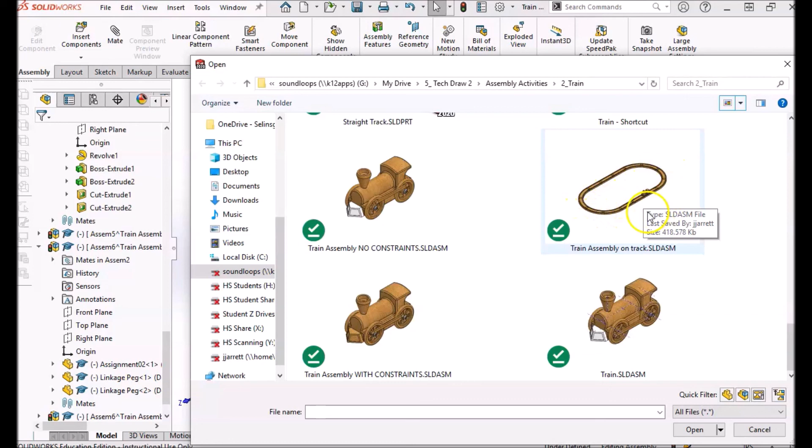There are videos online that will actually show you how you can assemble this onto that track and actually have motion constraints so it will actually go around and around and around. But of course, that is enrichment. So from here, I would just save it and move on to the next one.